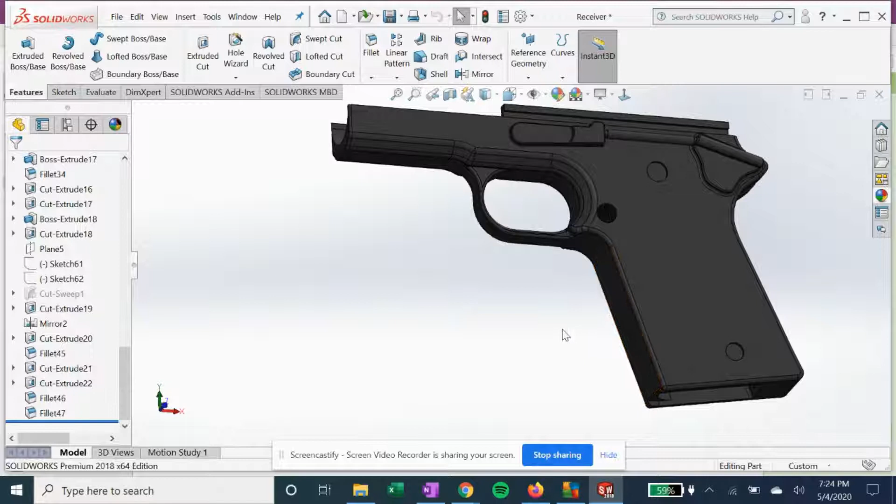We are going to perform a swept cut explanation because these corners where you hold the gun are a little sharp.

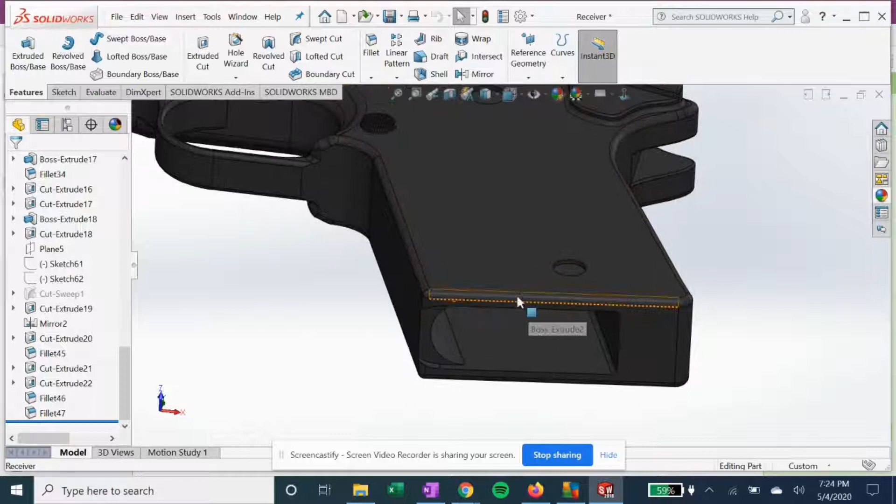So let's use a swept cut to kind of mellow out this corner here. The first thing we need is our closed profile sketch, so we're going to go ahead and draw on this face here, this bottom face.

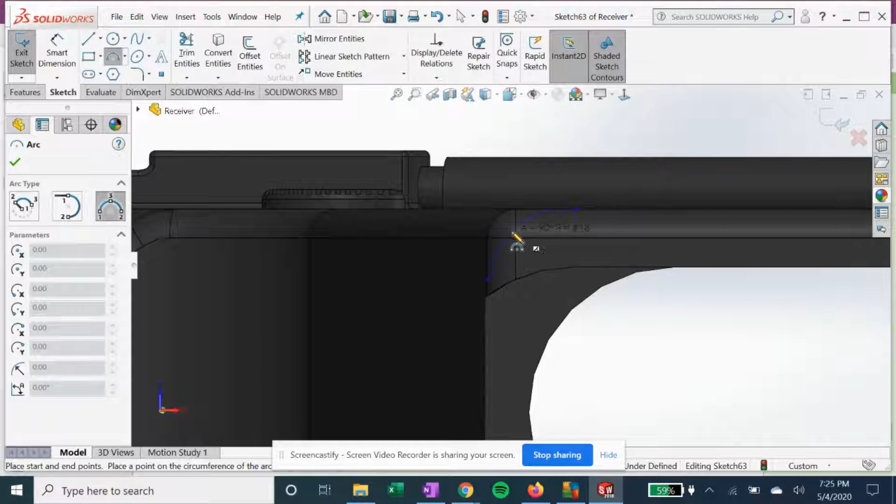We're going to use 2 points. We'll place one here, and we'll place one down here. Now we'll do an arc, something like that.

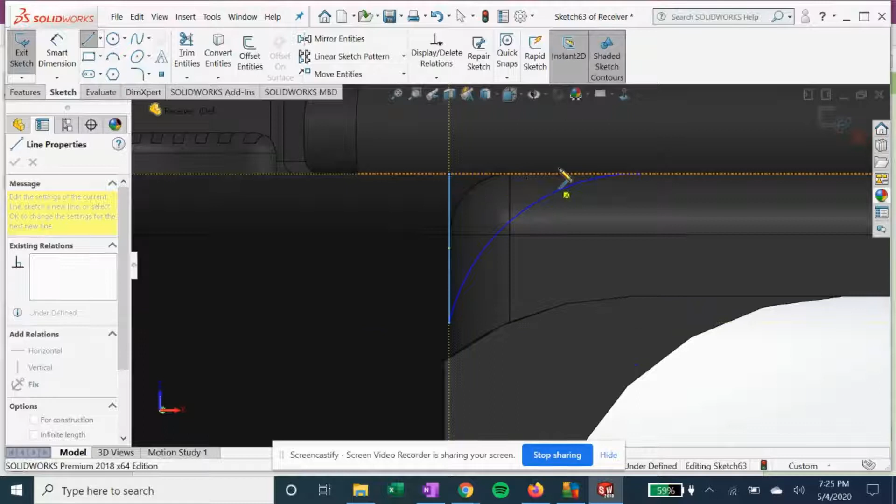Zoom in a little bit. And now we can kind of trace a closed loop using these lines. All right, now we have that profile sketched there.

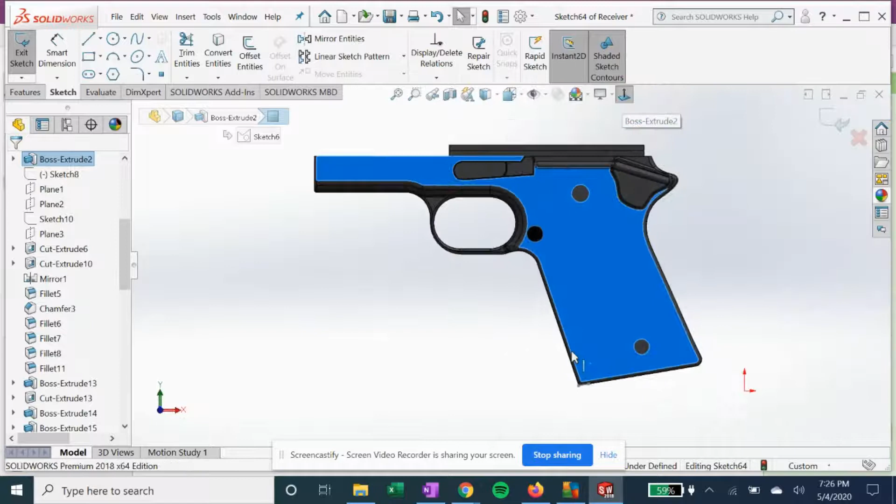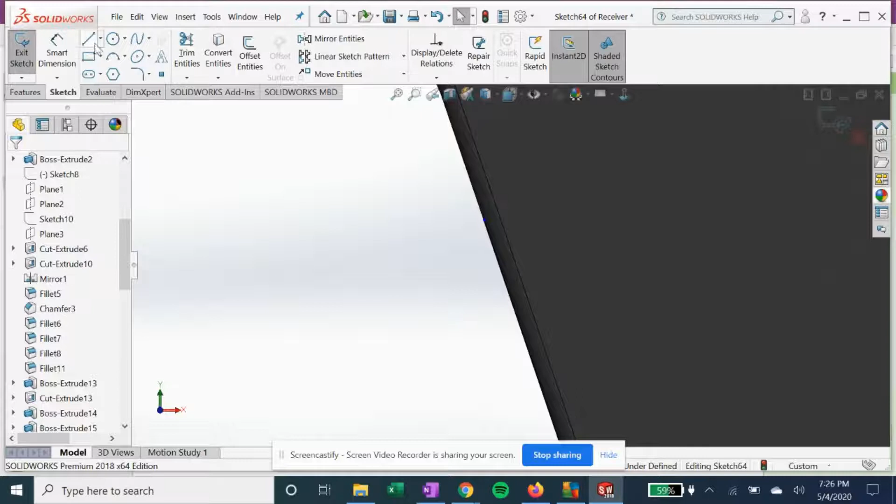We're going to go ahead and sketch on this face now. Go ahead and connect it here and then here so that it intersects our line here on the other sketch. And we will use a spline to then start coming out of this line here away from the part.

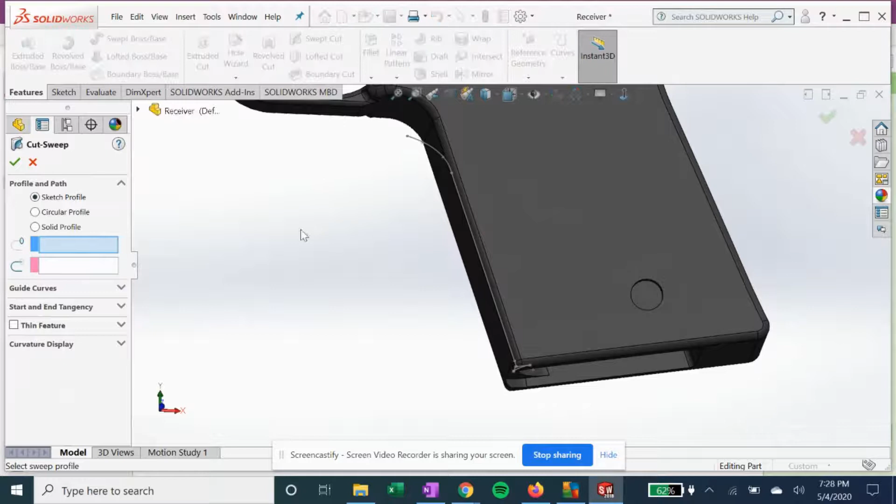All right, so now we're going to go to the swept cut feature. For our profile, we're going to select our sketch 63. Our path is going to be here. And then it'll give us the preview, and we can hit OK.

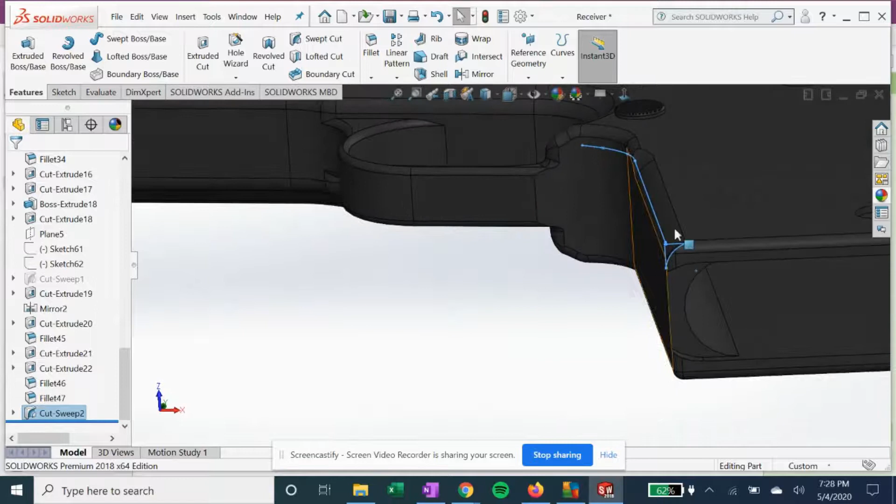So you see how this flattened the corner nicely here, to make it more of what we want. So that's just one example of a swept cut. There's many others. This is just for beginners getting started with the feature.